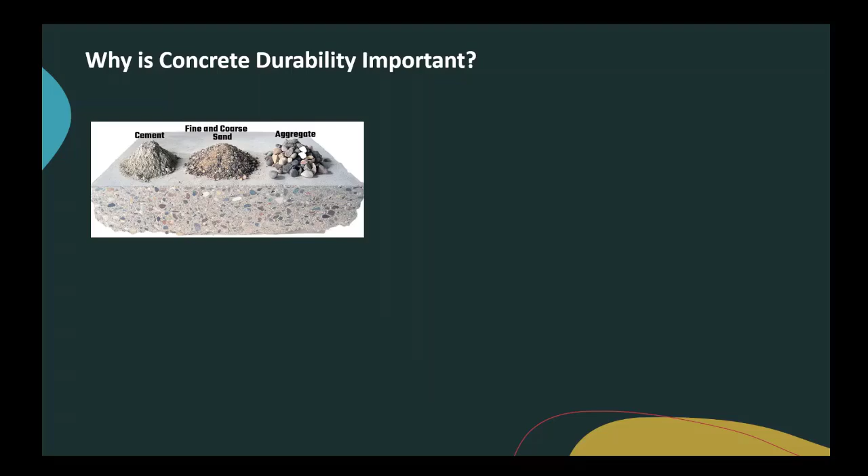So why is concrete durability important? Because it can cost human life. Three years ago, the Florida building collapse cost 98 people their lives. And what was the reason? It was the ingress of water. Basically, water from the deck constantly seeped into the garage area under the pool, causing corrosion, and then the building collapsed.

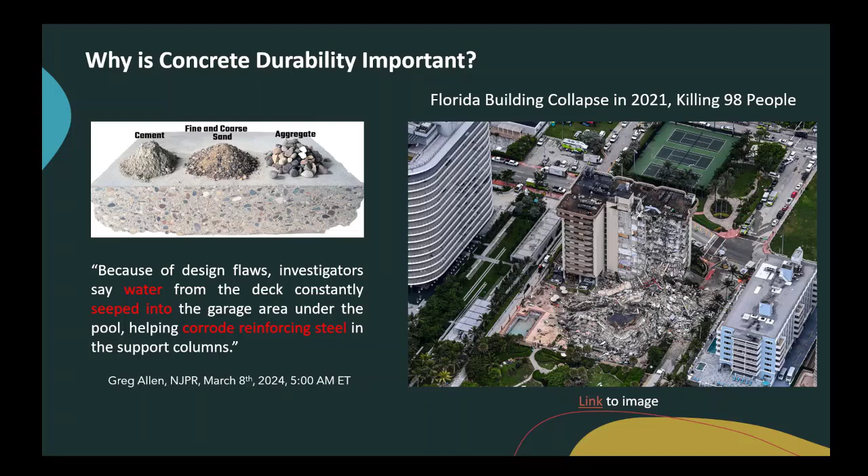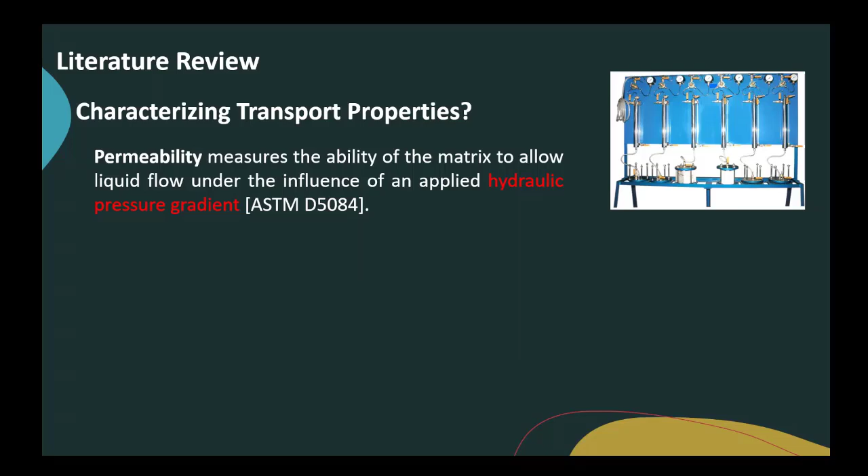There are many test methods in ASTM to characterize transport properties. One of them is the permeability test, and I'm pretty sure many of you have used this test. There's also the diffusion test, and finally the absorption test. All of them are useful — I'm not criticizing any of them. They can be combined to give us some idea.

But the first two, if you look at the apparatus or equipment, they can cause error for many reasons. For the last one, you coat all the faces except the bottom, and the dry sample touches water and absorbs liquid. We measure this absorption as a function of time — that's called absorption, well explained in ASTM C1585. It's purely based on capillary suction. There are some theories where people say there are different mechanisms, but scientists believe this is purely capillarity.

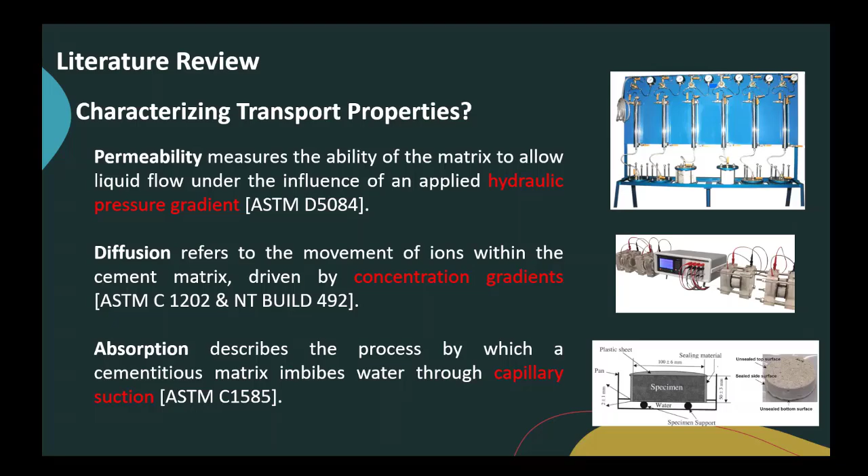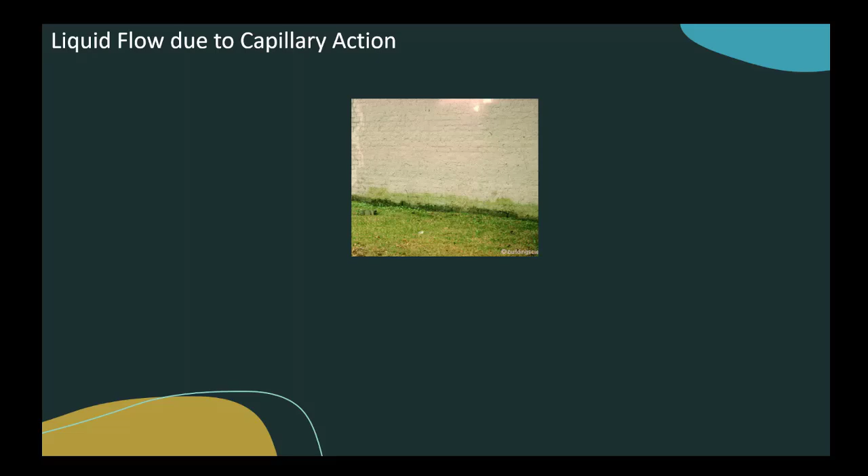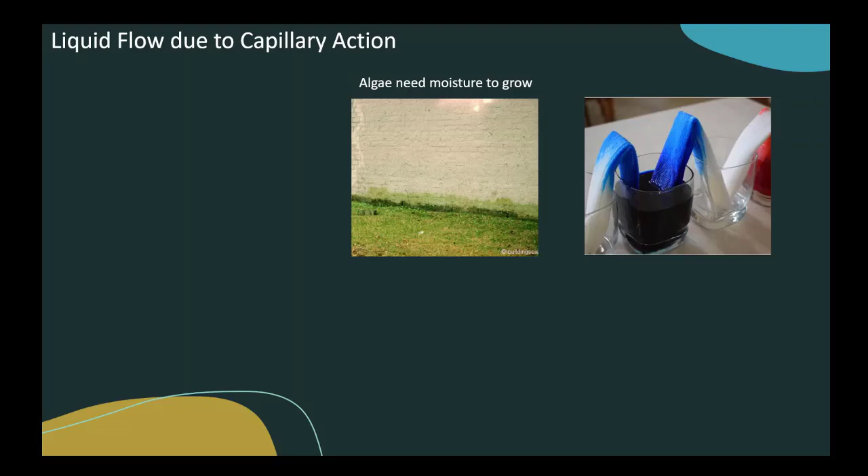So let's talk about liquid flow due to capillarity. If you look at a brick wall, you'll soon realize algae needs moisture to grow. And if you soak a paper towel in a dye solution, why does the dye solution rise? It's again because cellulose attracts water. This is the experiment they showed us in high school.

If all the conditions like material type and liquid type are constant, but you change the diameter of the tube from left to right, the capillary height increases. The corresponding equation says the height is 2 sigma cosine theta over g rho r. Sigma is the surface tension of the liquid, r is the radius, and g and rho are gravity and density of water. Two variables here: theta, the contact angle, and r, the radius. So the capillary height is controlled by r and theta.

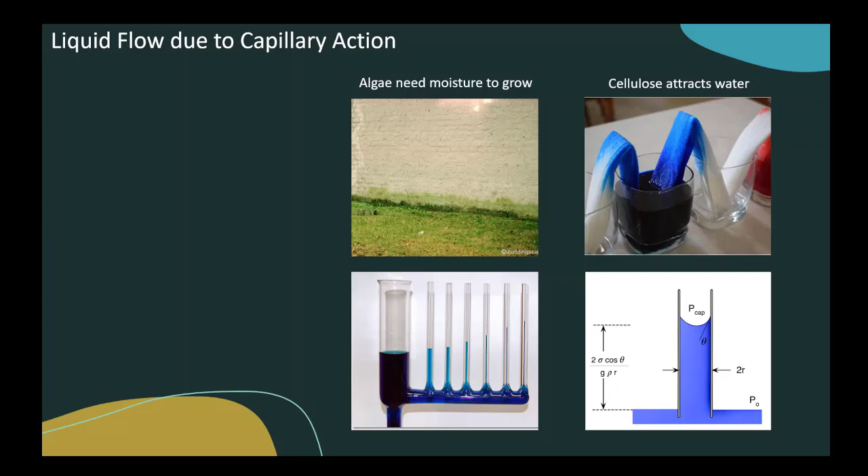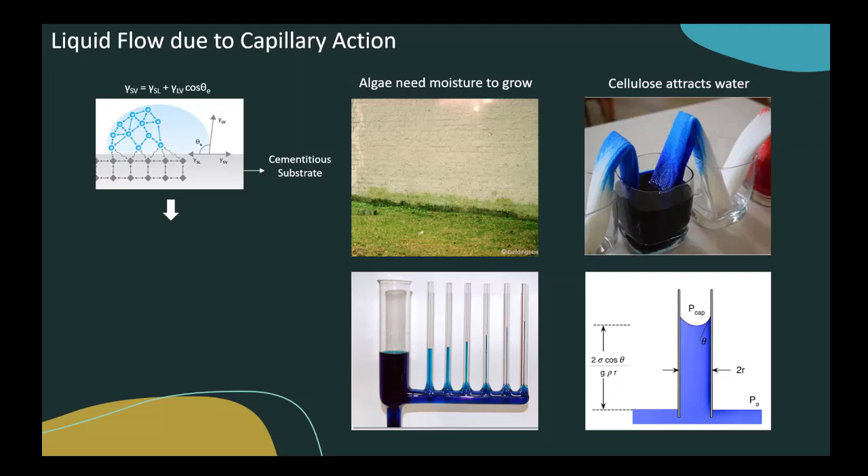So that was my initial thought during my PhD: what if I place a single water droplet on the surface of cement paste and see if I can indirectly measure porosity in the cement paste? That was my initial thought.

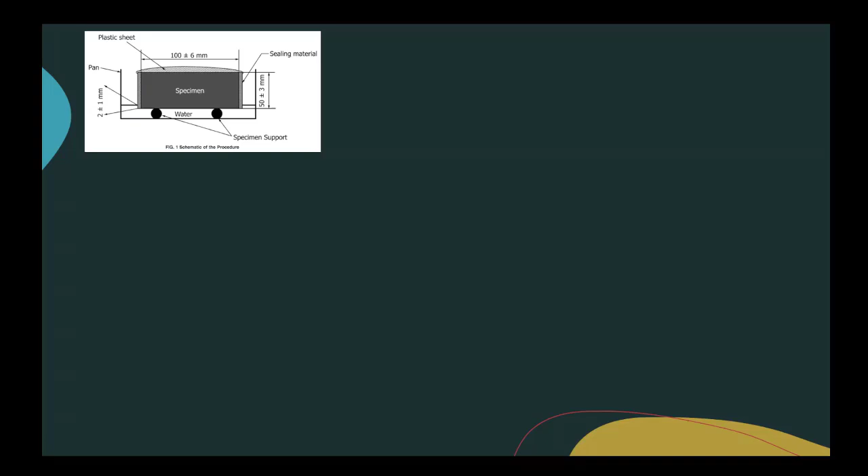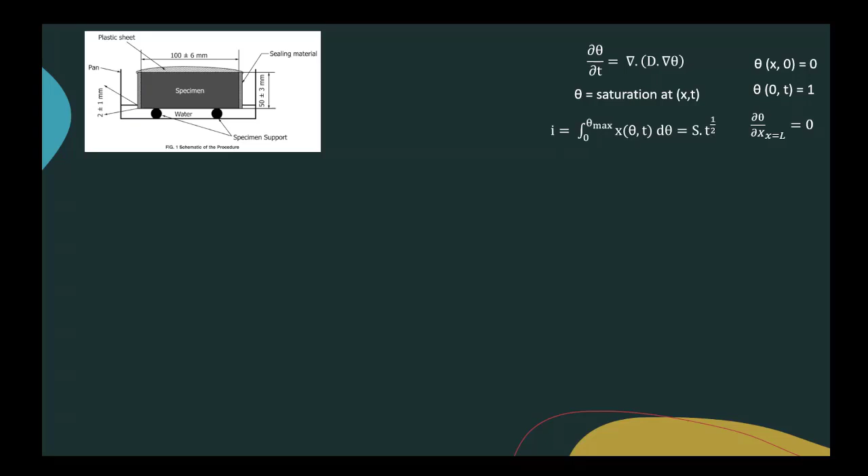So this is the geometry of liquid absorption in the ASTM test. This is the one-dimensional diffusion equation, and knowing the initial and boundary conditions — the sample is initially dry, saturation is 100% at the surface, and the flux or flow rate at the top is 0 — we can estimate penetration or cumulative absorbed water as a function of the square root of time. S is the slope of this line, which is called sorptivity.

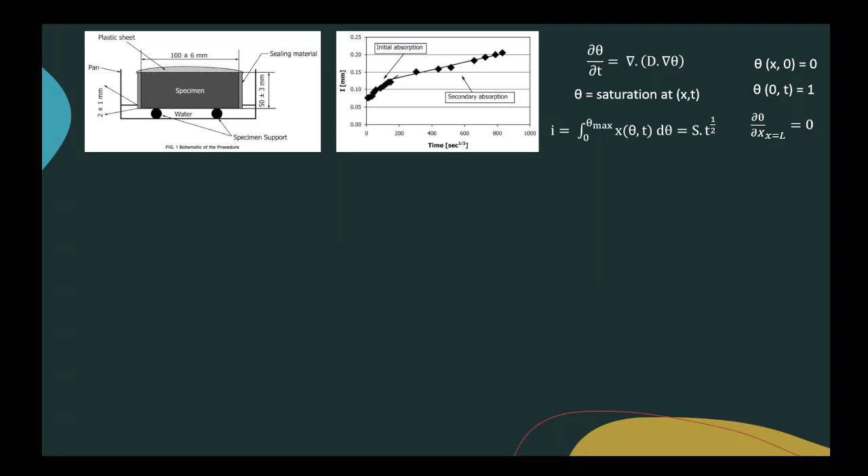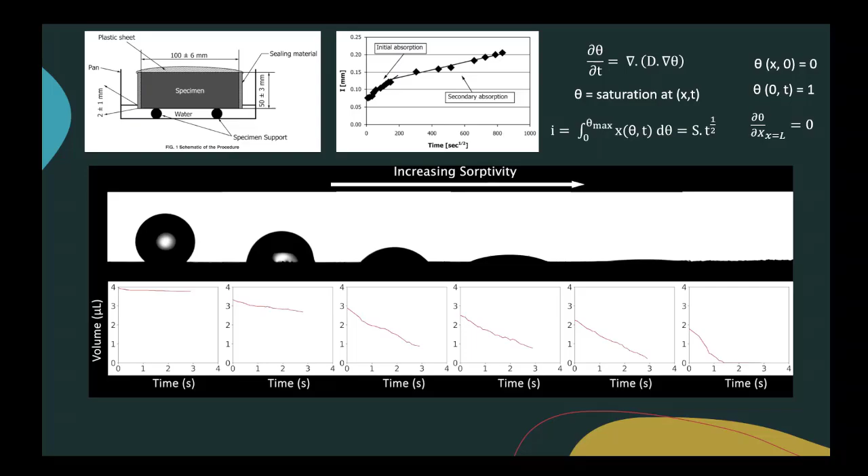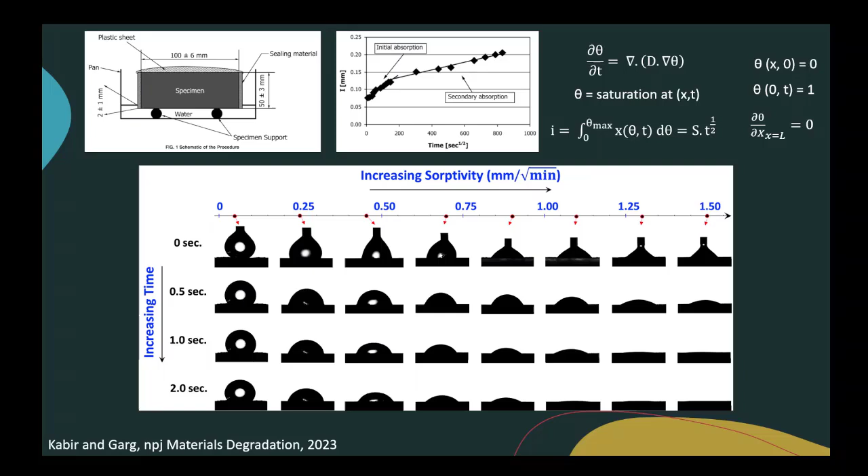If the S value is higher, that means our matrix is porous — more thirsty to absorb water rapidly. I did this experiment on a bunch of cement paste substrates. From left to right, sorptivity increases, and in fractions of seconds you can quickly capture the behavior of a liquid droplet on the surface of a sample. This work was published last year.

But what about concrete? This was just paste. So this is something I'm currently working on. Concrete has different parts, different regions, and water behavior can be different on different phases.

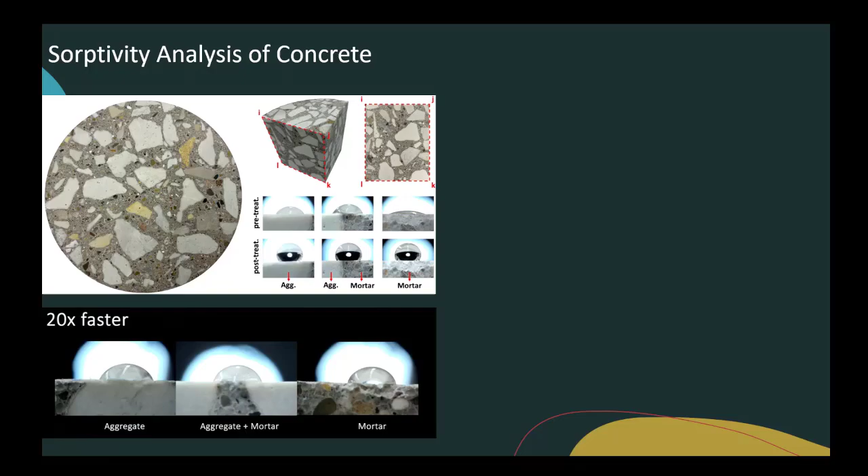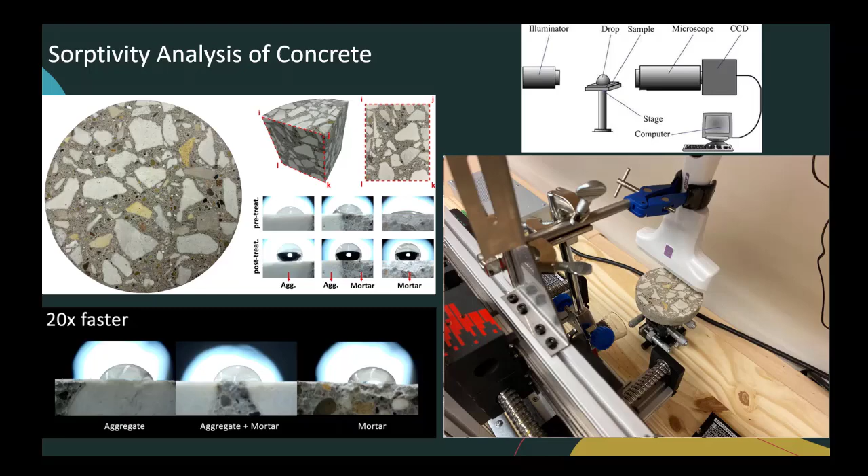A few days before Sangmin left our office for Los Alamos, he helped me come up with this stage. I built this XYZ stage. Looking at the front part, we have a multi-channel pipette which dispenses liquid more systematically. The camera is placed at a constant position from the pipette, so the image is always focused. The camera views the sample from the side, and two pieces of information are recorded: the displacement of the pipette and the camera information.

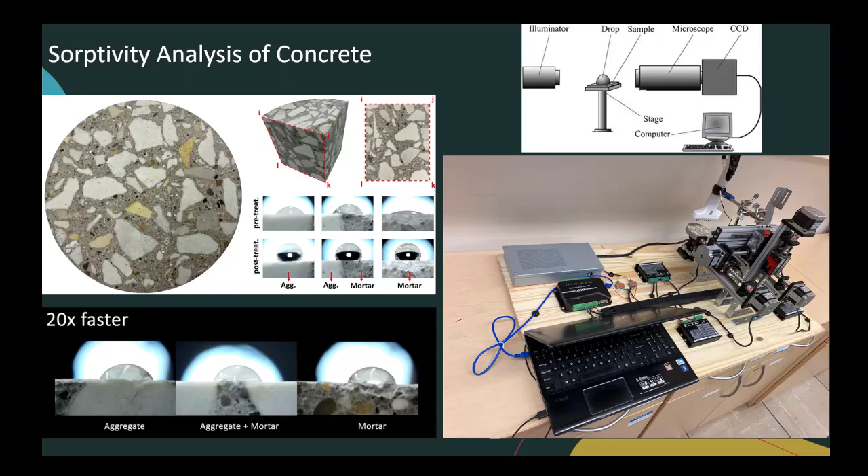So this is an ongoing project, and hopefully I'll be able to characterize concrete this way. But let's say for now, this is placing a single droplet on the surface of cement.

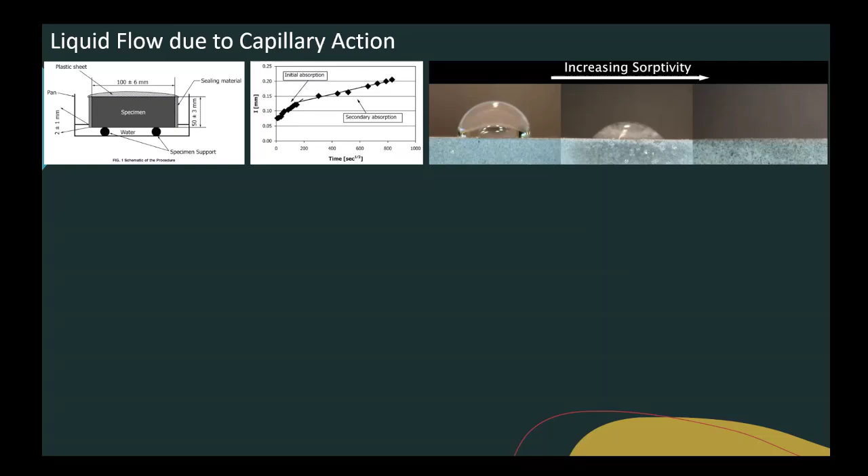What I can capture is the initial absorption rate. What I cannot capture is the secondary absorption rate. The secondary absorption rate is due to the slow dissolution of entrapped air in the sample, while the initial is the initial capillary suction. So this droplet method can only predict the first one. This shows I was able to predict the initial sorption in a matter of seconds, but I couldn't do the second one. So how do we do the second one?

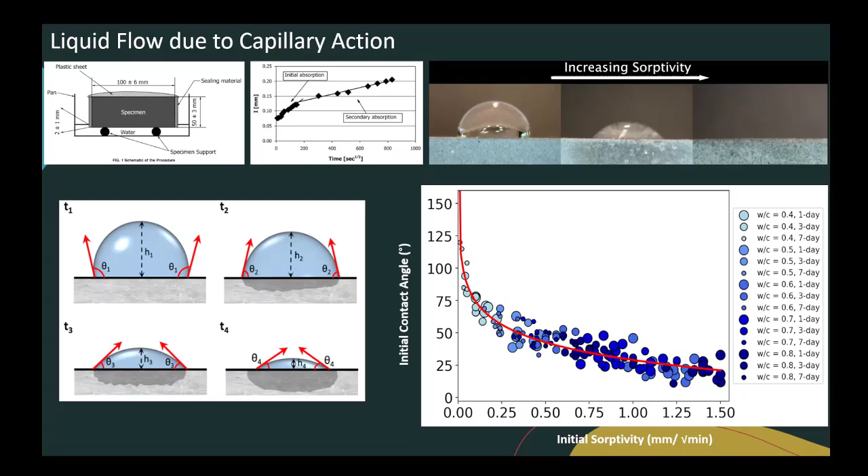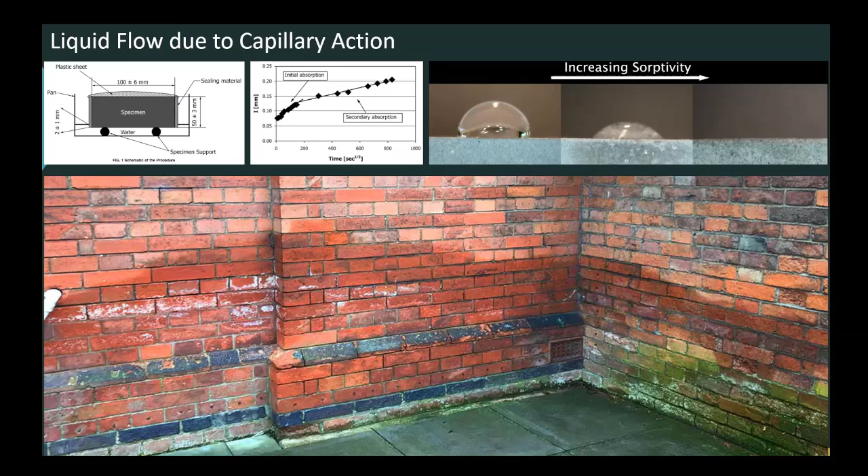If you look at this brick wall, what you notice is the water level, or the waterfront. This is what we call the apparent water level. It's visible to the naked eye, but we don't know if it corresponds to 100% saturation or 30% saturation. We just see a front of water.

So if we look at this sample, water is absorbing, and you see the waterfront increases with time. And this is another sample, the same thing is happening.

So my theory is, what if you measure how fast the water level changes, and then use that information to predict the sorption properties? Instead of using the traditional measurement, which is very tedious and time-consuming, imagine you do this test for 7 days.

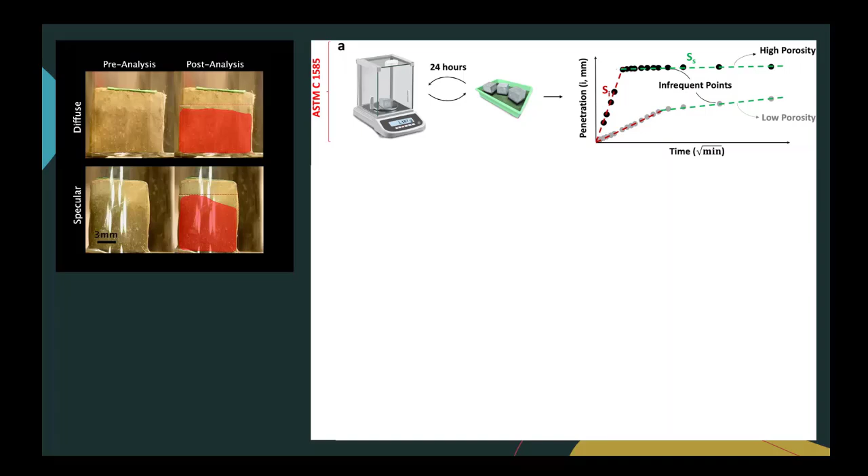We just place 2 cameras, or 1 camera, it's up to you. It analyzes the sample and captures the area ratio, or water level, and combines it with time. So how fast the change in water level is tells you something about whether the material is porous.

This video shows how, just by looking at the image, we can combine the area and time value using deep learning to predict penetration as a function of the square root of time, in real time.

So the computer vision code, we wrote it from scratch. It has input images, which are RGB images, and a segmented binary output. In the middle, it has a feature pyramid network, ResNet 50, and a region proposal network.

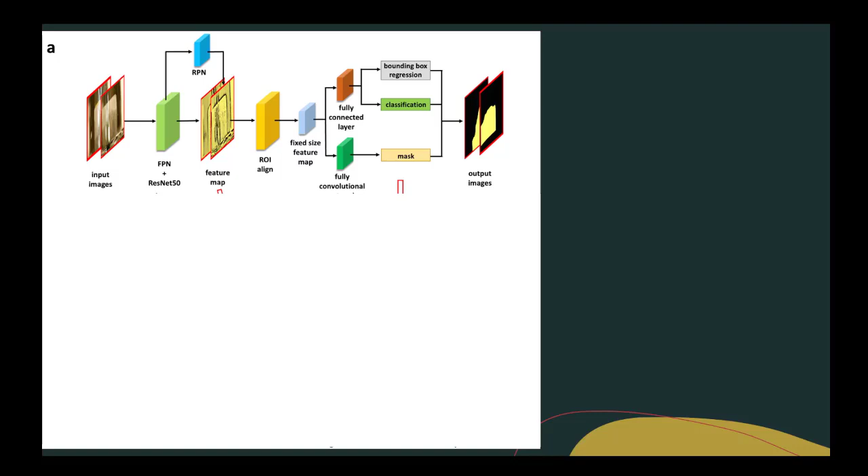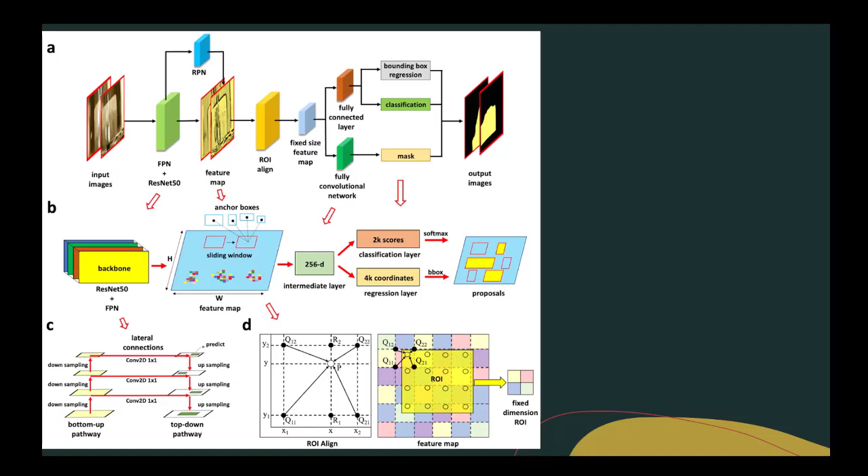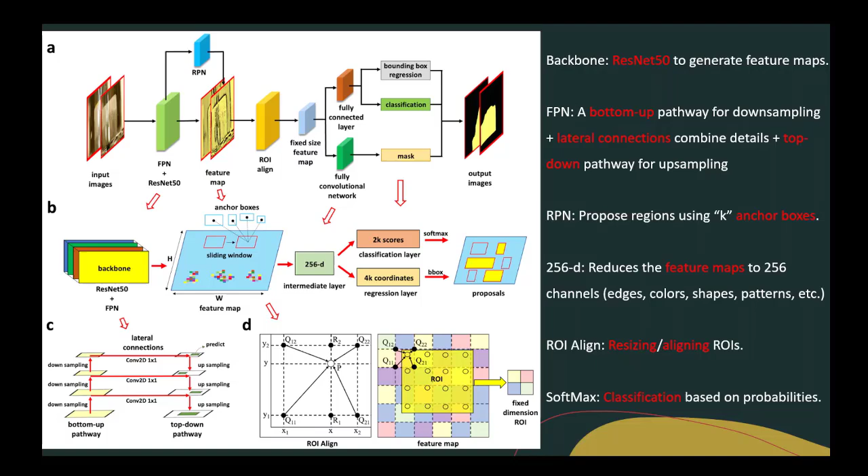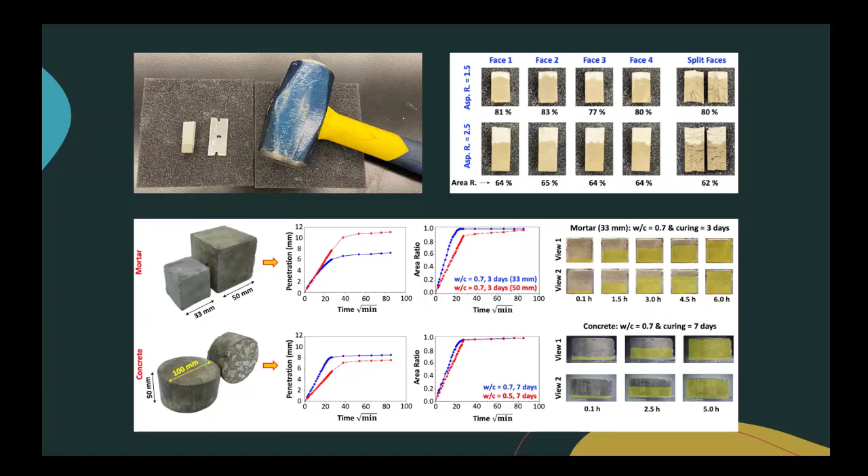Apart from that, I also used cement paste mixed with different SCMs, clays, fly ashes, slags, even foam concrete. This was the foam solution.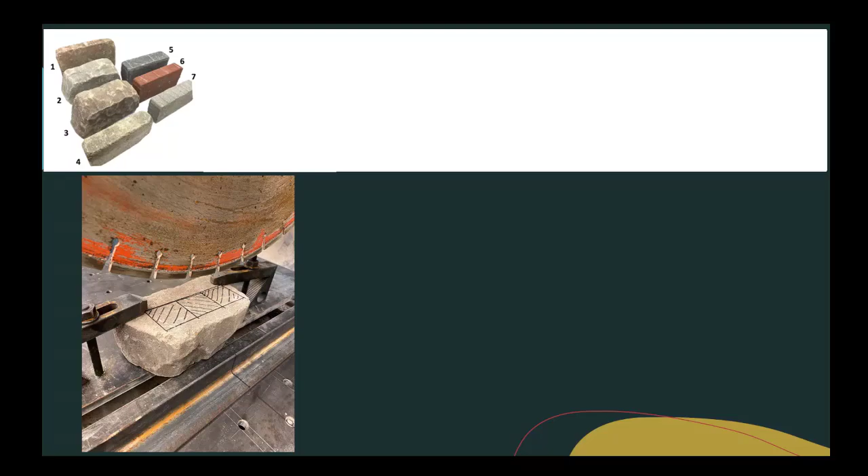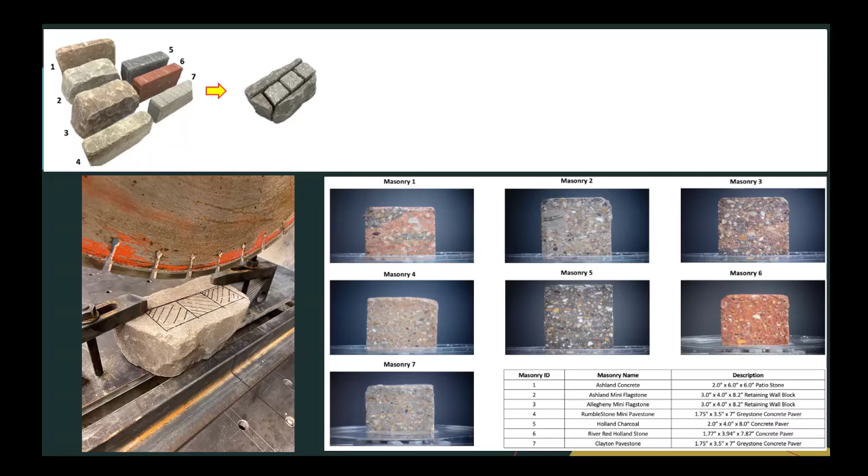It even works on masonry elements. I cut this sample into 2-inch cubes — these are the samples. I tested 7 commercially available masonry units, everything I could buy from Home Depot, and it worked. So I was able to predict that. It works on paste, mortar, concrete, and masonry.

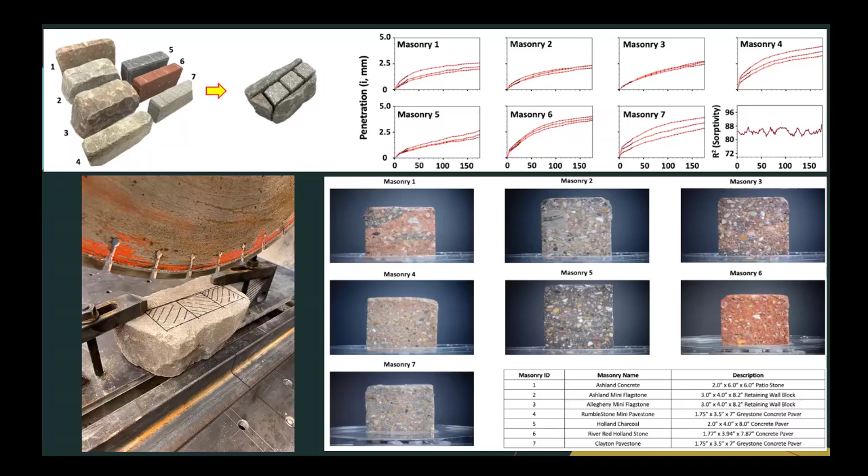Also, last week this work was accepted in Nature Communications. So hopefully in 2 or 3 weeks it will be available online.